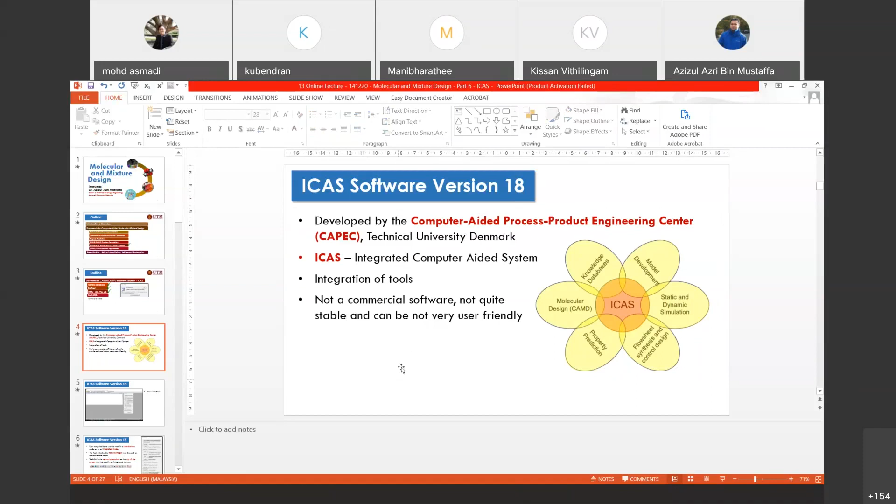So basically, when you open ICAS, I don't think I have to explain to you how to open ICAS. I'm sure all of you know how to open ICAS. Otherwise, let me know in the comment box if you have any chat. So when you click ICAS, then you will see this interface. So this is what we call the main interface, right? So this is the main interface of ICAS.

And then here you will see there's a task manager here.

You can't open the software. Have you opened it before? Mani? Have you tried to open it before? Basically, you can just search for the, yeah. Dr. Azizul, I will help on the chatting.

Okay. All right. So basically, if you have opened it before, then you should be able to open it again lah. It's only that sometimes, like I said before, it may be unstable. It may have problems. Maybe what you can do is try to restart your computer lah. Try to restart it and maybe you will get lucky and it can open. Sometimes that's how I did it lah. Maybe you can try to restart it and hopefully it can open lah.

Okay. It's okay, Mani. Later on, we try to sort it out.

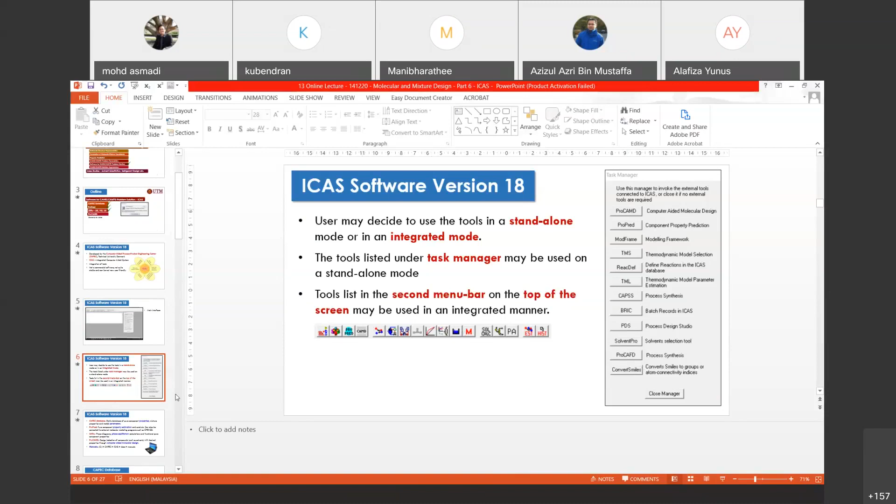Okay, so this is just some description of some of the tools that we will cover today. The first one is the CAPEC database. So now you know the meaning of CAPEC, right? It's the name of the center. The CAPEC database contains a static database of pure component properties, mixture properties and also model parameters. Later I will show you the database. This one is just for introduction.

And then the second tool that we will look at is ProPred. Using ProPred, we can do pure component property estimation and analysis. And then I will also show you the utility tool whereby we can perform phase equilibrium calculations involving VLE, SLE, and LLE. And then, with respect to functional, we can also calculate the functional pure component properties.

And then finally, we will cover ProCAMD, whereby you can do design and selection of components such as solvents with desired properties through computer-aided molecular design. So basically, the steps that we have learned in chapter 4, we will see how we can implement them using software. Because it's quite impossible lah to do design manually. So we need the help of computer tools lah.

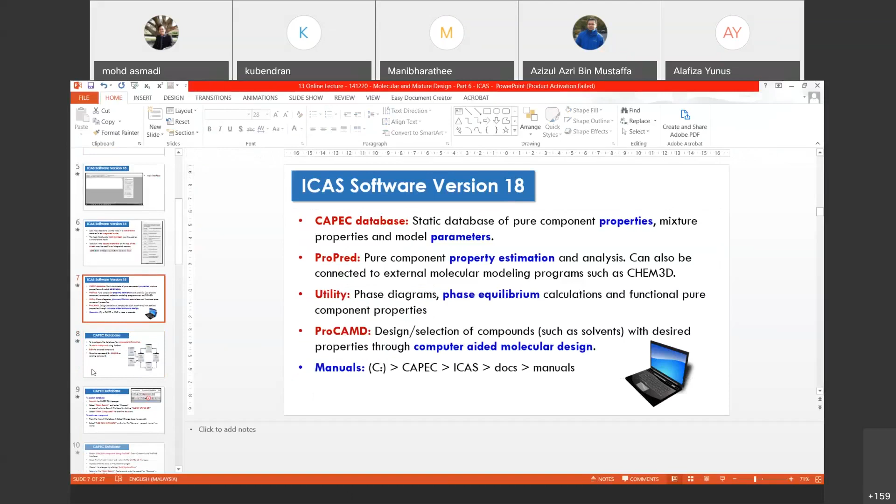And then in terms of the CAPEC database, what can we do with the database? We can investigate the database for compound information. Later on, I will show you how. We can also add a compound using ProPred.

If, let's say, there's a certain compound which we are interested in and it is not in the database, we can add it in the database, for example, using ProPred. And then we can also edit compounds that we have created in the database. Let's say we have obtained new information, maybe new data for that particular compound that we want to add in the database. We can do that. And then we can also create a compound by cloning an existing compound.

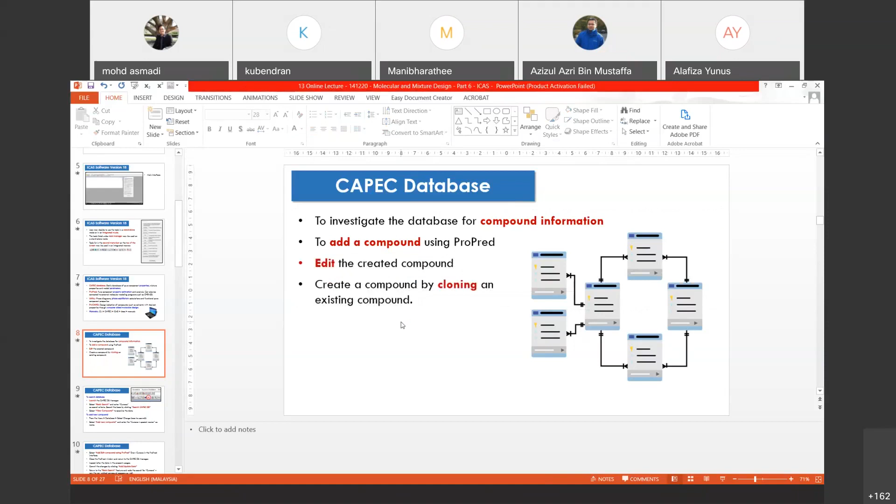Okay. And later on you can read the slide because we already distributed this note, right? So maybe later on you can just read the notes and see how you can do all this. Today I think I will only discuss how to search the info and how to read the data that we have. In terms of adding a new compound and cloning an existing compound, I think you can try to do it on your own later.

Okay, so I think maybe we can go to the database. Basically we just open the ICAS software. Then we will see this interface. Can you see the ICAS main interface now on your screen? Yes. Okay, all right. So basically, in order to launch the database, we click this button, the red M button here. It's called Database Manager.

Okay, so I hope you can do this together with me. Okay, maybe if you have two devices, then it would be better. One with your ICAS, another one with the WebEx.

Okay, so in order to launch it, you just click the button. We click it, then we will see this window. Okay, this is the window. We can maximize it. So basically, I just want to show you how we can look for data of any compound. What we can do is go to the left side of this window and click basic search. Then we will see this view.

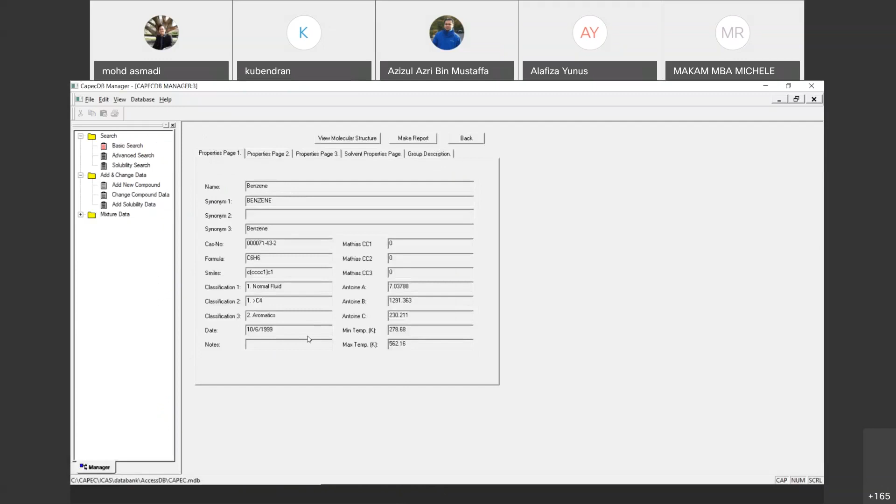So basically for the database, I just want to show you how to search for the compound and how to look at the data for that particular compound. Like I mentioned in the slide, you can also add a new compound here. You can also clone an existing compound, which I will not do because I don't think it's important. But if later on you need to do that, just let me know, or look at the slide or the manual.

So basically, the thing I'm highlighting is that ICAS is not yet that stable and user friendly. You need to adapt to the disadvantages, and hopefully you will be able to get the needed data or compound. Okay, any question on the CAPEC database? Questions in terms of usage, not in terms of cannot open ICAS or cannot find the icon or whatever. Any question? No.

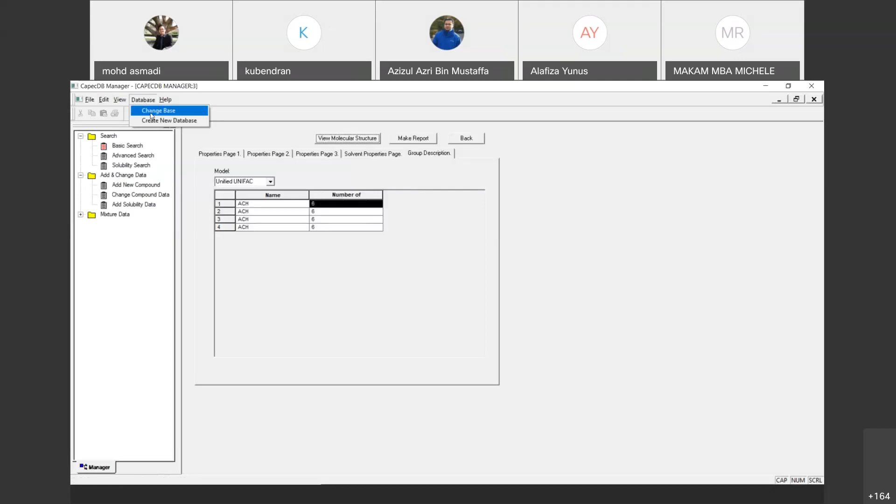It's quite straightforward, right? In terms of database, there are many different databases you can find in this software. If you go to this part, you click this tab, database, and then you can change the database. So there are many available databases in ICAS, and one of them is CAPEC.

How to know this is CAPEC? Just look at the end of the file name. You can see CAPEC.mdb here. So this is the CAPEC database. You can also go to another database, for example, the DIPPR database. Click OK, and you can search for whatever compound you need in the DIPPR database. So there are many different databases available in ICAS.

And how to know which database it is now? You can just refer to this part at the bottom. You can see here DIPPR MDB, so we are in the DIPPR database. Okay, so that is on the database. If there's no question, on to the next tool.

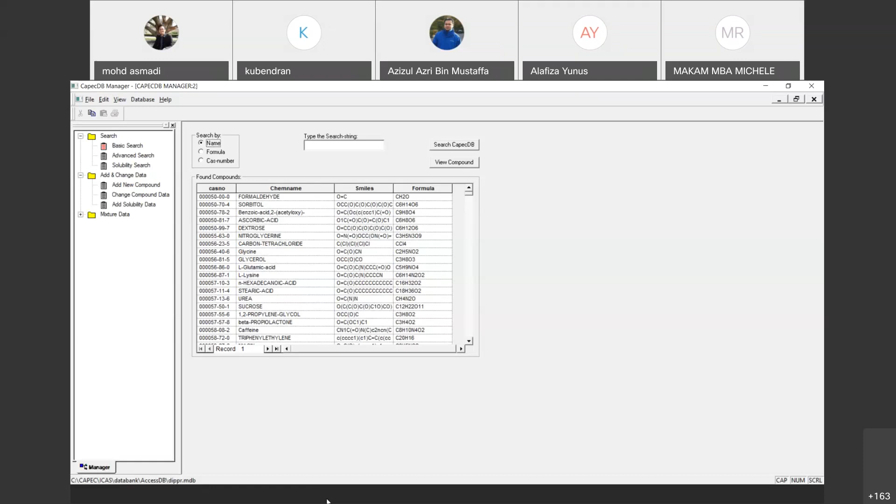So the next tool that I want to discuss with you, or to demo, is the ProPred tool. Dr. Azizul, sorry. Yes. Yep. One question. Yeah.

So which database would you recommend to be used as the default database from so many databases? Okay. So in terms of database, maybe I would suggest either CAPEC or the DIPPR. But it depends, because sometimes certain compounds we don't have in those two databases. So maybe you can try to look for it in other databases. Okay, meaning these two will be the most recommended. So if we can't get what we want, then only we go for other databases, right?

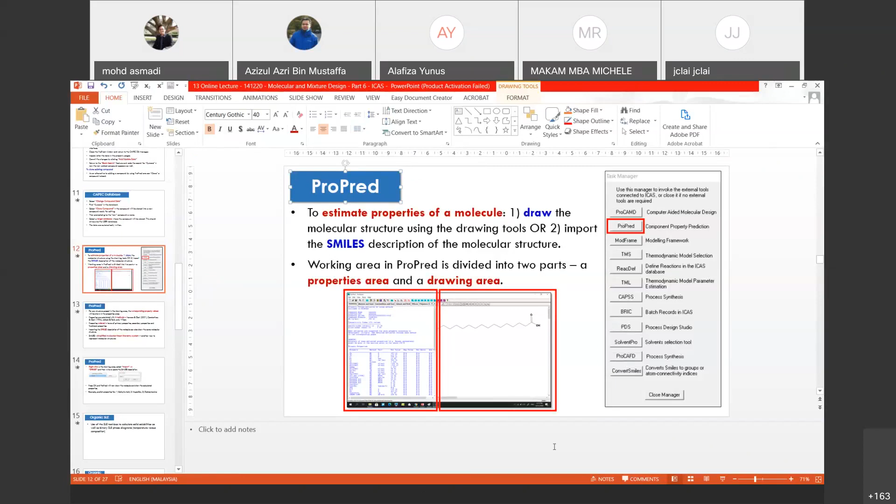Yes. Okay. But the thing with CAPEC and the IPPR database, we cannot edit the database. So if you want to edit a database, then you need to create your own. For example, you can create a new database, and of course it will copy, for example, the CAPEC database, and then you can add whatever other data that you want to add.

Okay, so later on when you look at the manual, you will see that, like for example here, if you need to add a new compound, then you need to change the database to user.mdb. Because you cannot edit CAPEC and the IPPR database, but you can edit the user database.

Okay, right. So moving on to the next tool. The second tool is ProPred. So what is ProPred actually? ProPred is short form for property prediction. So basically, it is a tool that can be used to estimate properties of molecules. In order to do that in ProPred, we can either draw the molecular structure using the drawing tool, or we can import the SMILES description of the molecular structure.

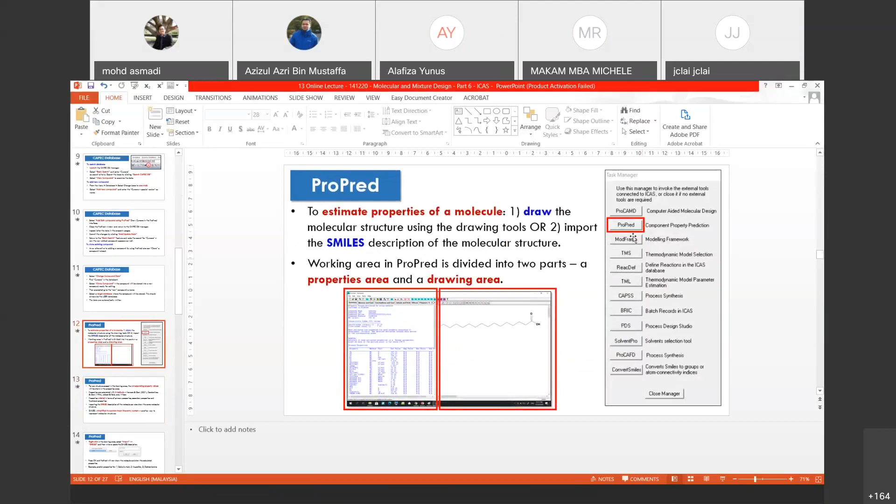There are several ways that you can open it. You can go to the task manager and then click this button, and you can also go to the top part of ICAS and click here, this one, or you can click the toolbox tab and click property prediction. There are three ways how you can do it.

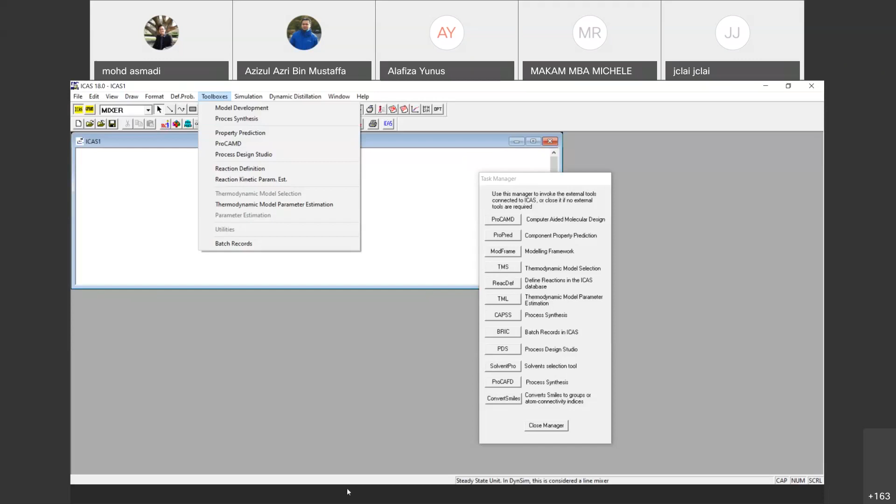But I myself have some problems opening ProPred. I don't know why. Sometimes okay, sometimes having problems. So that's why I already opened it here, so that during the workshop I can already use it. I don't want to close it and reopen because I'm afraid that maybe I will have problems opening it later.

Okay, but actually there are three ways how you can do it. You can click by using the task manager, you can click this button, or you can go to the toolbox tab and then click property prediction. If you click one and there's a problem, you can try the second one. Otherwise, you can try the third one. If something's wrong, then of course you close ICAS and reopen ICAS. If there's still some problem, restart your computer.

Okay, so this is ProPred, right? The left side is the properties area, the properties page, and the right side is the drawing part. All right, so this is the interface for ProPred.

Okay, so for any structure present in the drawing area at the right side, the corresponding property values will be shown in the properties area at the left side. And there are four property models that we have in ProPred, which can be used to predict primary properties. So we have Marrero and Gani, the one that we learned in class. Then we have Constantinou Gani. Basically the difference with Marrero Gani is only that they have only two orders. Marrero Gani has three orders. Then we have Joback and Reid, and the last one is Wilson.

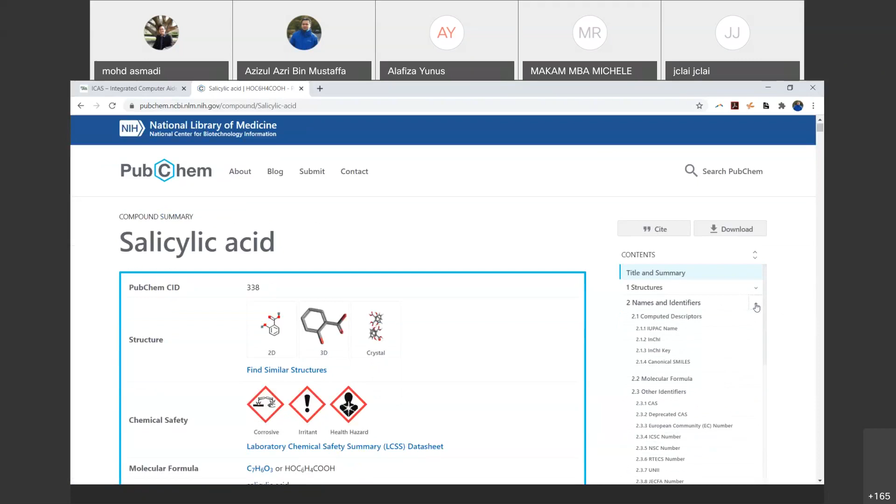Then go to the right part, at the table of contents under names and identifiers. And then we will see at this part canonical SMILES. You can click that one, and then go to the left side. So under canonical SMILES, we can see this coding. These are what we call SMILES. It's like we have eyes and then we have the smile. Just copy this, and then we go to ProPred.

And then I go to the right side of the window and right click. You will see this box. Go to import, and then you go to SMILES. Click SMILES. Then you will see this box. What we need to do here is just paste the SMILES that we have copied from the website. So here it is. We just click OK.

So ProPred will draw the structure for us from the SMILES that we have imported. So we don't have to draw it on our own. But of course, if you do not know the SMILES of a certain compound whose properties we would like to know, then you need to draw it manually, because it's a bit tricky to draw. But you can try later on, if let's say you need to draw.

Okay, so when we import the SMILES, the structure of the molecule is automatically drawn here, and automatically the properties will also be estimated using the four methods that we have in ProPred. So maybe you can click summary for the overall summary. What we can get here is the primary properties. These are the methods highlighted in this table.

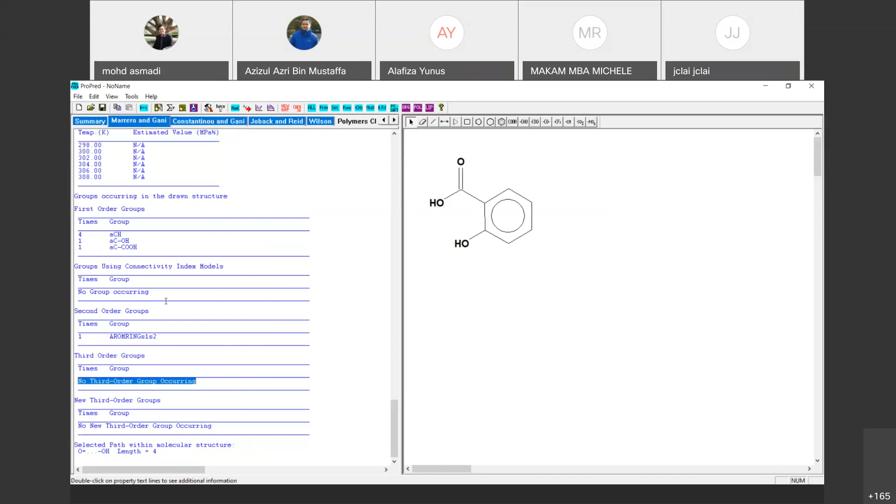Okay. So basically using ProPred, you can also get information in terms of the first, second, and third order groups used in order to predict the compound. And of course, also try the others. We have some other examples, for example, ibuprofen. So you can just go to the internet, write ibuprofen SMILES, and then click this one, PubChem.

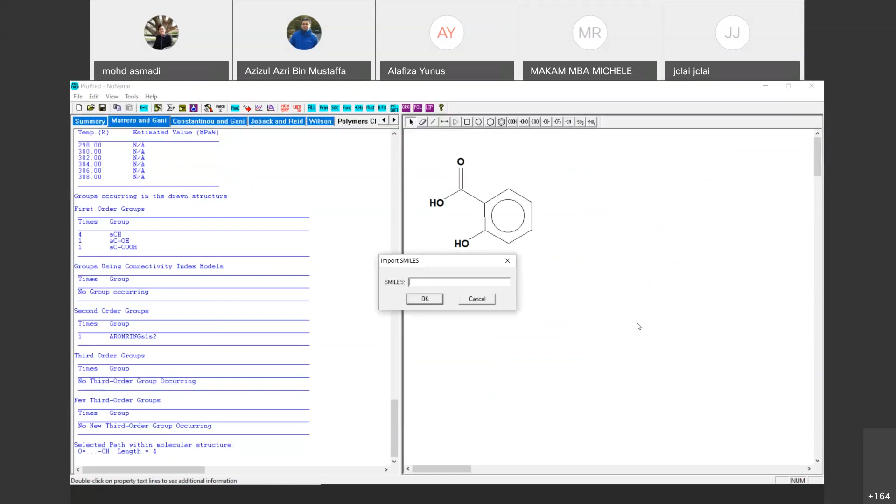Okay, and then name and identifiers, canonical SMILES, and then copy the SMILES here. It's impossible to memorize, right? So we need to copy and paste. Copy, and then here we right click, import, SMILES, paste. Okay, so this is the structure and this is the estimated properties. If we click Marrero-Gani, we can look at the properties.

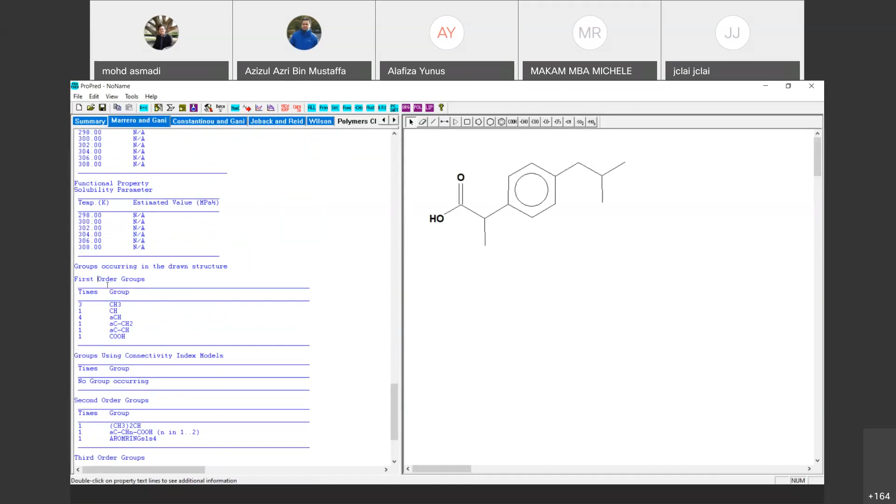Estimated properties here, primary properties, then we have secondary properties here. These are functional properties, but maybe because of a missing parameter or something, they cannot be estimated. And here are the group assignment, group vectors, first order group, second order, and no third order. And of course you can try it for many different compounds. Any question on ProPred? No, doctor. Okay, right.

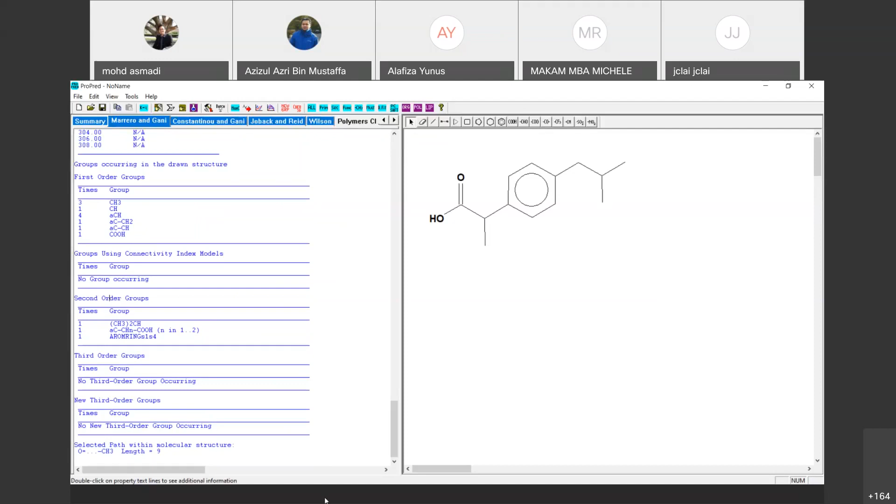So moving on to the next tool. Next I want to show you this SLE, organic SLE. What is SLE? It stands for solid liquid equilibrium. It's important for extraction process, leaching process. So the use of the SLE toolbox is to calculate solid solubilities as well as binary SLE phase diagrams. The details of the steps, you can refer to these slides. But of course, I will show a demo.

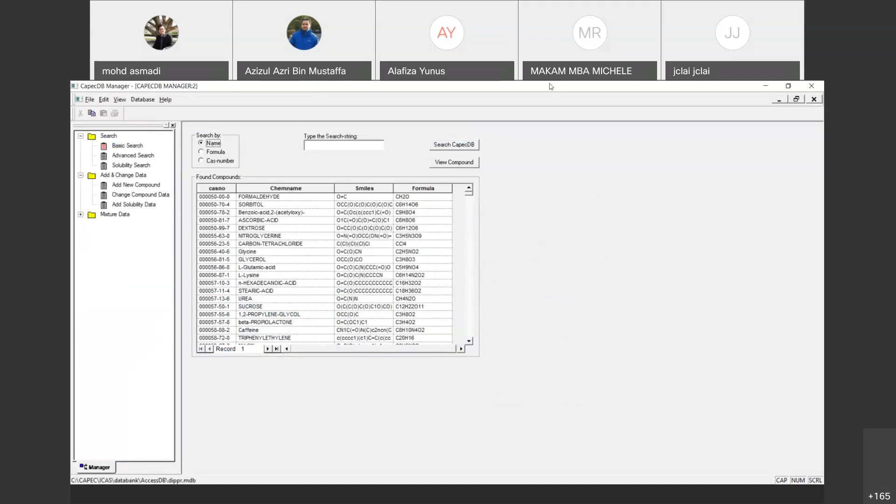So we go to the main interface. This is how to calculate SLE or to generate a solubility curve. First of all, we need to draw a stream. So we click here, this arrow, to draw a stream. Then we need to specify the compounds that we have in this stream, so I just double click on the arrow. Something is running, so I need to maybe delete. Maybe ProPred. Okay.

So when I click the stream, we will see this page. Oh, sorry, but before that, I need to specify the compounds. I need to click this button, specify the components in the system. There are many databases here that we can use. Maybe you can choose the CAPEC database, for example. Let me check the example in the slide. The one used in the slide is benzene and phenol, so I will look for benzene and phenol.

Search here, benzene. Like I've shown before, it's not that straightforward. Need to find it. Cannot find it. Maybe I go deeper. Benzene. Okay, here is benzene. Click benzene and then you click add, at the right side. And then what was the other one? Phenol. Right, we have phenol here. So we add. Then we click OK.

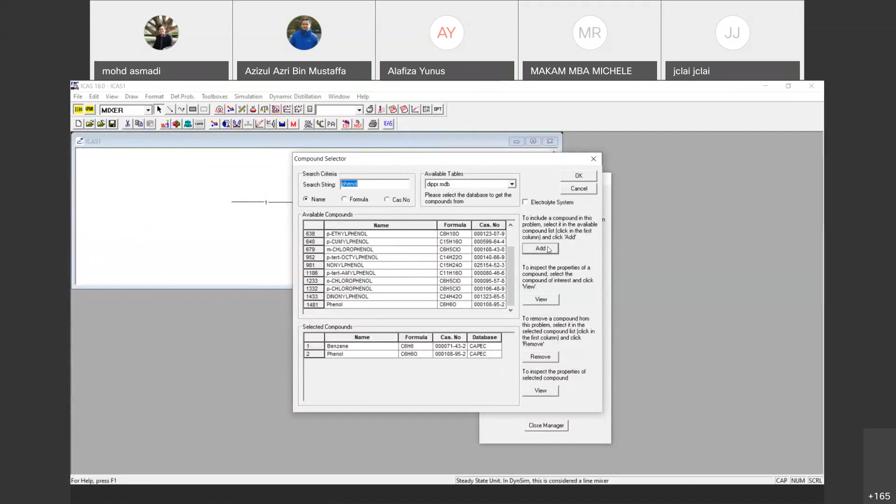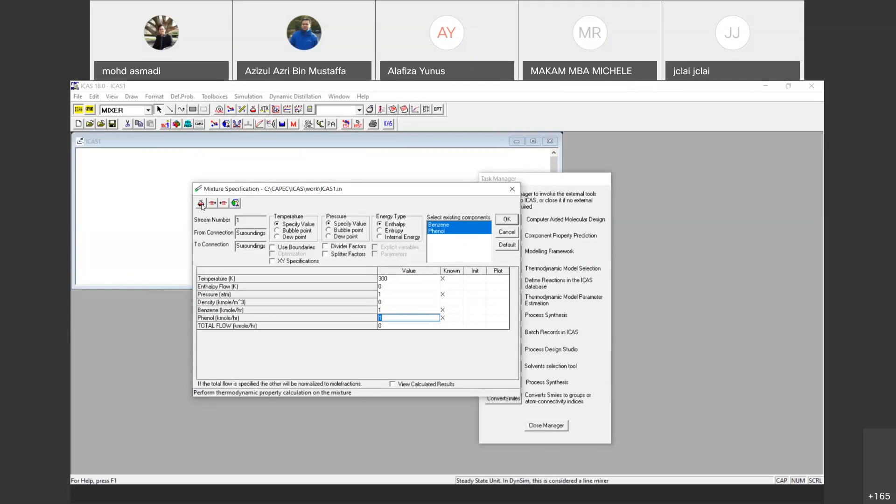Then after that we click the stream. We can already see the components that we selected before. In this example, as an initial value, we can put temperature 300, just an example. Pressure 1 atm, and for the molar flow rate, we just put 1 there. That is just to specify the condition, and then we click this one in order to specify the thermodynamic properties.

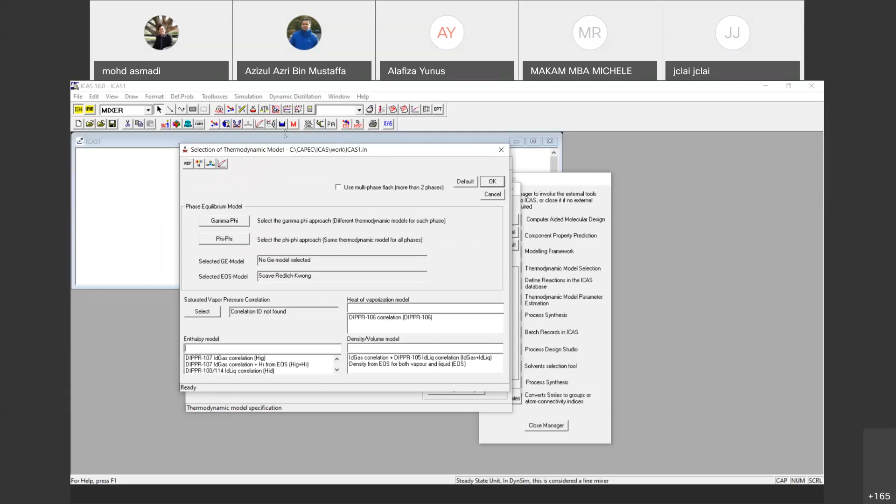We'll see this box, and then we click this one. This is to specify the thermodynamic model. In this way we can perform many different calculations. But before doing that, we need to specify the thermo model first by clicking this portion. This is the thermodynamic model. We can choose gamma-phi here. Then we can select the models for the liquid phase, for the vapor phase, or whatever. So we just specify.

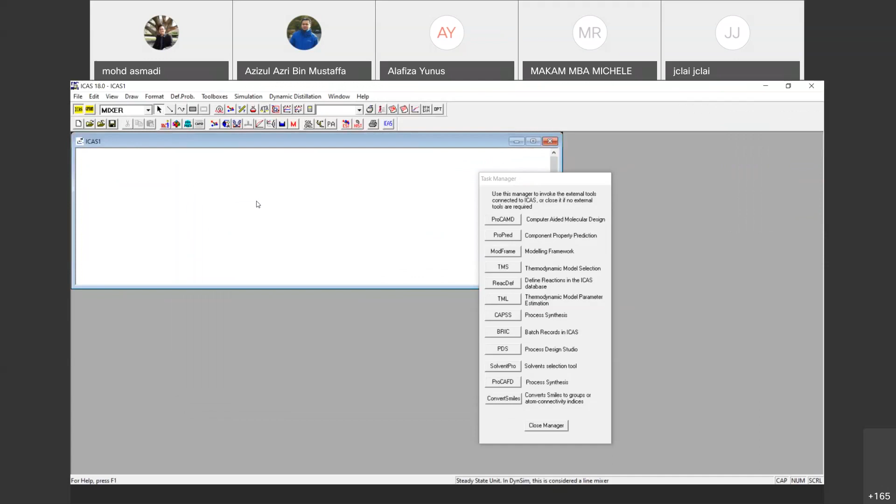Okay, I repeat. It would be helpful if you let me know which part you are not clear on, rather than just say I'm fast or I'm lost, because I can't help you if you say that. I can only repeat.

Doctor, can you please repeat the part where after we add the compounds, what we should do? Okay, do you have the handout with you? The handout. Do you have it with you or not? Because when you refer to the demo, you should refer to your handout. Please refer to your handout.

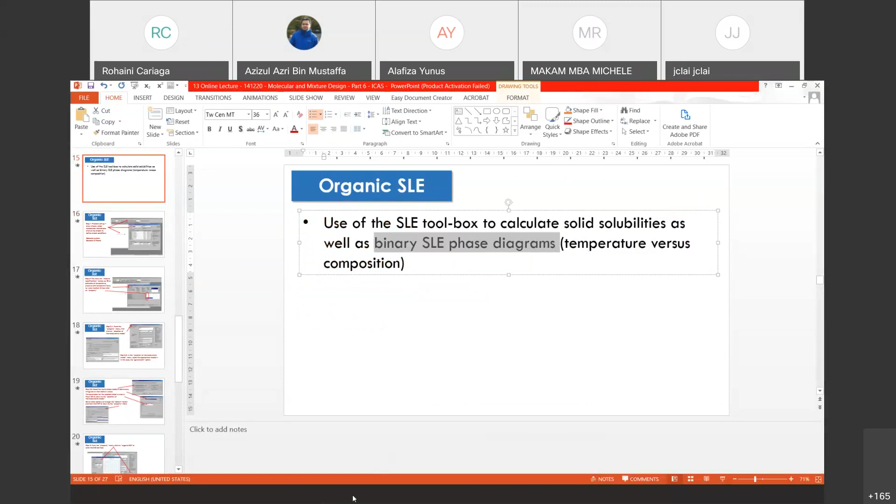Okay, so let me repeat. What do we want to do? We want to perform SLE calculation, whereby we need to calculate the solid solubility as well as the binary SLE phase diagram, which is useful for the leaching process, for example. So we go to ICAS. First of all, what we want to do is draw a stream. Click the stream here and then draw the stream. Got it?

Okay, so now this stream is only a stream. There's no information. So we need to define the problem. We need to specify the problem, by first listing the components involved in the system, right? So in order to fill in information in this stream, we click this button, in order to specify the components. So we click this one, then we will see this box. The title of this box is Compound Selector.

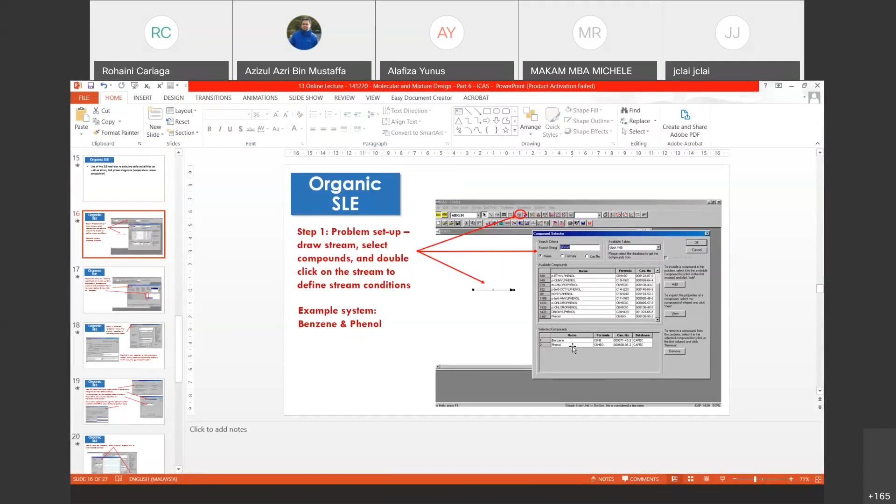Before this, I've shown you some databases that we have, right? So you can see the list of the databases here under available table. There are many databases, but I choose the IPPR. Based on the example that we have in the slide, the system is benzene and phenol. So we just search for it, based on the steps that I've mentioned before.

It's only that for each compound that you have found, you need to click add, the add button at the right side of this window, so that it will add it in this part, which is the selected compounds. So these are the selected compounds, benzene, phenol. Then you click OK. Then in this stream, we already have the components, right? And then we double click the stream in order to further specify the system.

First of all, we specify the temperature, the pressure, and also the molar flow rates. You just put 1 here. Just put 1 ATM, 300. Yeah. Because later on we will generate a T versus X, temperature versus composition diagram, so this temperature is just an initial value. Pressure 1 ATM. So we have specified the initial condition of the stream.

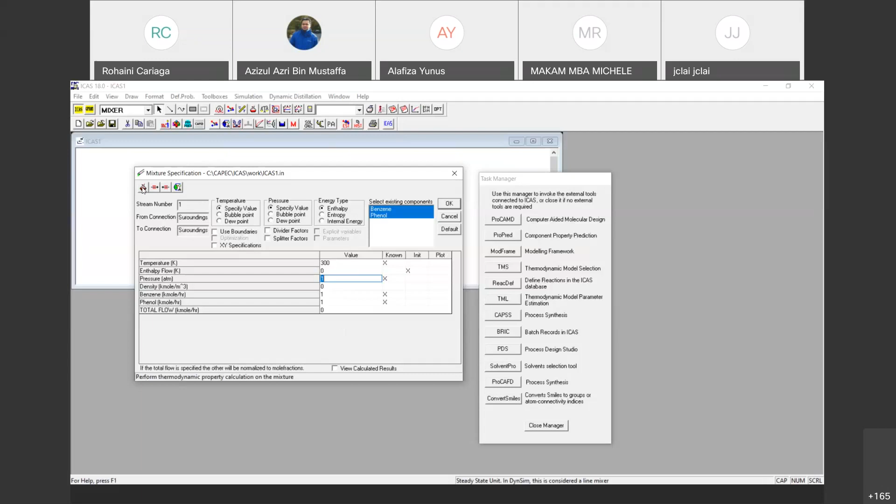Next, we click this icon. This is to perform whatever calculation we want on the system that we have defined. Click this one, then you will see this box. In this box, we can perform many different calculations. But before performing any calculation, I would like to specify the thermodynamic models that are suitable. So in order to do that, I click this button, which is thermodynamic model selection.

Click that one, then you will see another box. This box is where you can select different thermodynamic properties which are available. For this case, under the phase equilibrium model part, I click gamma phi. This one you already learned in thermo, you should know what gamma phi is. Click gamma phi, then we can see that we can select the liquid phase model, the vapor phase model, and the saturated vapor pressure correlation.

But since we want to perform calculation for solid liquid equilibrium, vapor may not be relevant, right? So we just click this one, select the liquid phase model. Currently, the assumption is ideal solution. But here we have benzene and phenol, so maybe it's not suitable to use ideal solution. Then what I do is I change the model. I don't want ideal solution. Maybe I can choose original UNIFAC, VLE, one parameter.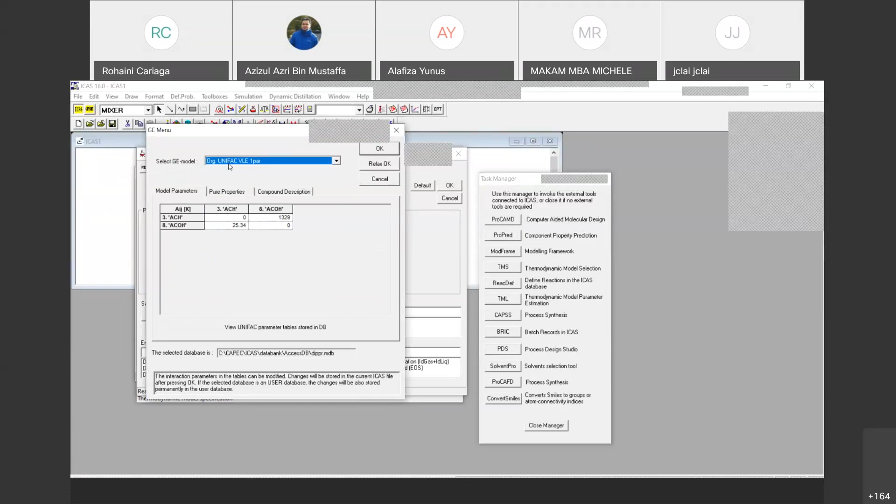For the UNIFAC model, I already discussed it with my section, so maybe they know. UNIFAC is a type of model which is based on group contribution. That's why we can see the parameters with respect to the functional groups. So I choose this model as my liquid phase model. I click OK. You can see here, this one has been selected.

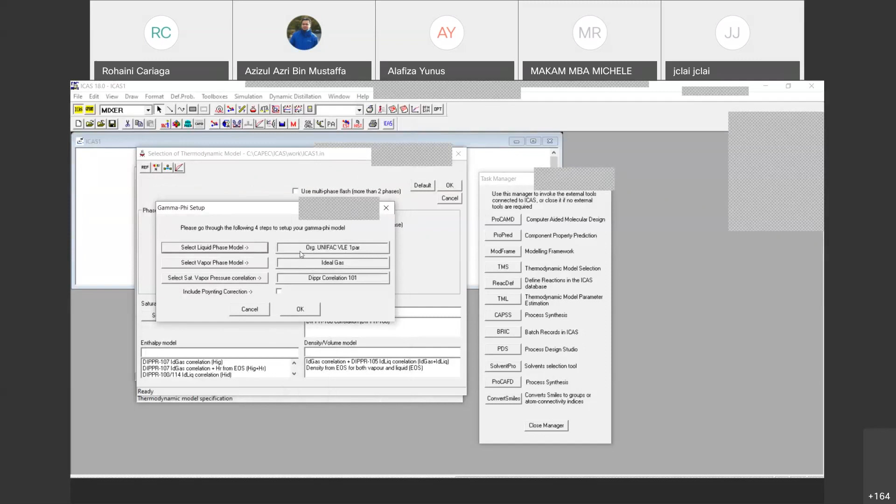Okay, and then I click OK. And then next, what I would do is click this one, default. So basically, for other properties, they will be using the default model. You just click this one. When we click this one, we can see that for the heat of vaporization, it's using this model. For density volume, it's using this model. So those are the default models.

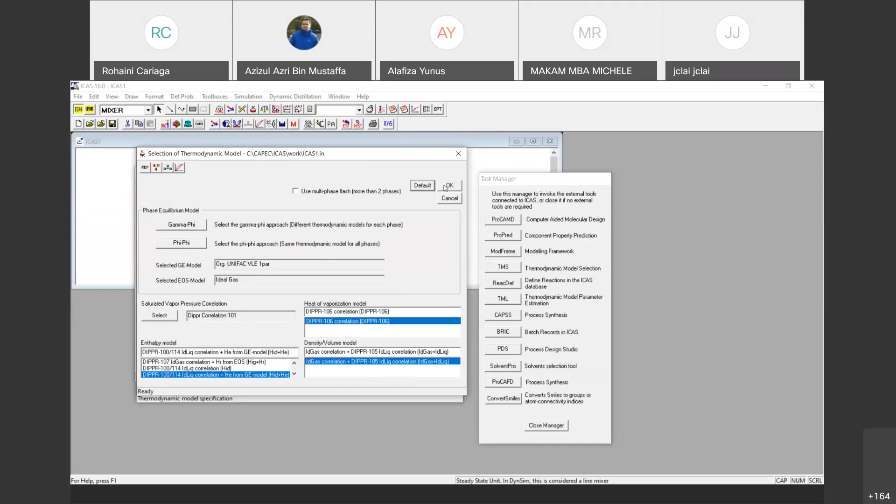And only the GE model, the liquid phase model, is the one which we choose. The other one is default. Okay, after clicking default, then we click OK. After we click OK, the window for the thermo model selection will be closed. So it will bring us back to the box whereby we can perform many different calculations here.

So we want to perform the SLE calculation, so we can click organic SLE here, this button. Of course, there are many properties that we can calculate, right? We would just want to click this one. This is the utility toolbox for SLE. So then we click organic SLE, then we will see this window. Okay, we can see the system and we know the melting points.

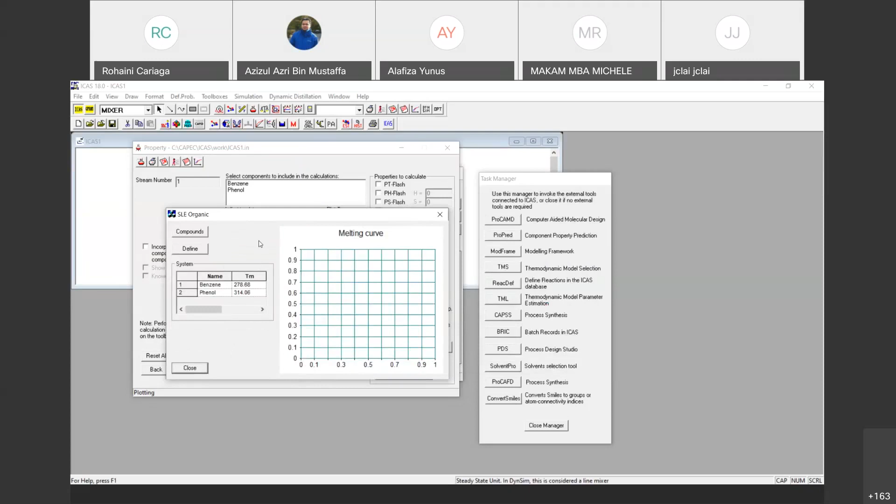Okay, so next what we want to do is generate the SLE curve, the solubility curve. So we click define. There are two ways we can perform the calculation. We can perform the calculation for the entire diagram, so from 0 mole fraction to 1 mole fraction. Or we can also do single point. Maybe we just want to know, at a certain temperature, what's the solubility of the X.

Okay, so here I want to show you how we can generate the entire diagram. So we click entire diagram, and then we click OK. Then here we can specify the increment of the X axis for the points that we want to generate for the whole curve. The lower the increment, of course, the smoother the curve. So we can just stick with the default 0.02, then we click OK.

And then in terms of the mole fraction, this is the range. Do we want to generate the curve from 0 to 1, or from 0 to 0.5, or from 0.5 to 1? We can specify here, but I want to generate for the whole diagram. So the first range I stick with the default 0, and for the end range is 1. So I click OK.

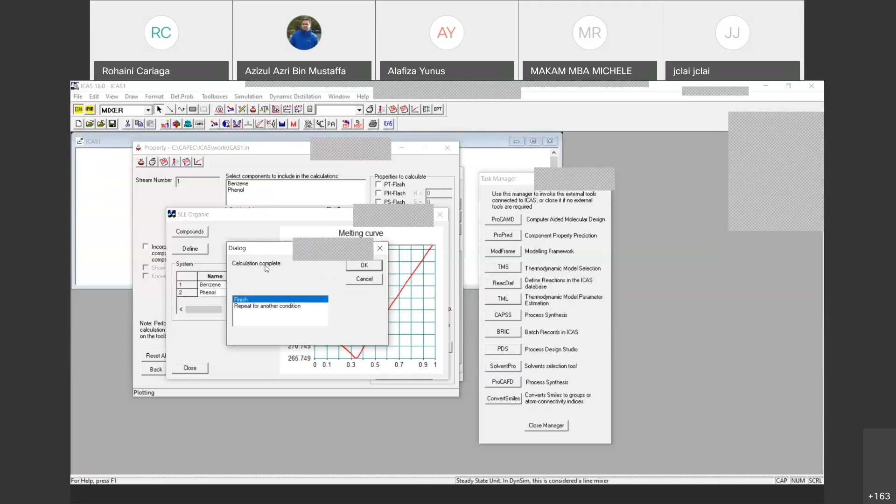So here, calculation complete. So this is the diagram, the SLE curve. And of course we can get information, because this is temperature, this is solubility. So we can know for a certain temperature what is the solubility of the system. So this is the diagram.

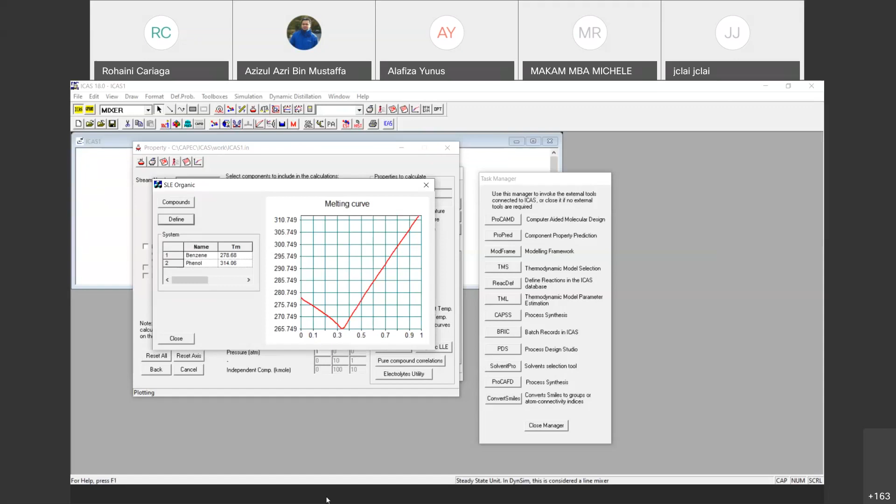In order to get the raw data, if you need to see the details in terms of the values, or maybe you want to do some modification, you can go to this address. Let me show you the path: Drive C, ICAS work. So the output file for SLE is ICAS1 SLE. This one. So you right click this file.

And then open with a Notepad type of app. So Notepad, and then okay. And then you will see these are the data: the temperature, X1, X2. X1 and X2 depend on how you specify the components.

So SLE is important for you to measure the performance when you do a solvent design, for example. You have many different candidate solvents, and you can perform SLE to identify solubility, compare between candidates and select the best one. Okay, so that is on SLE. Any question on SLE?

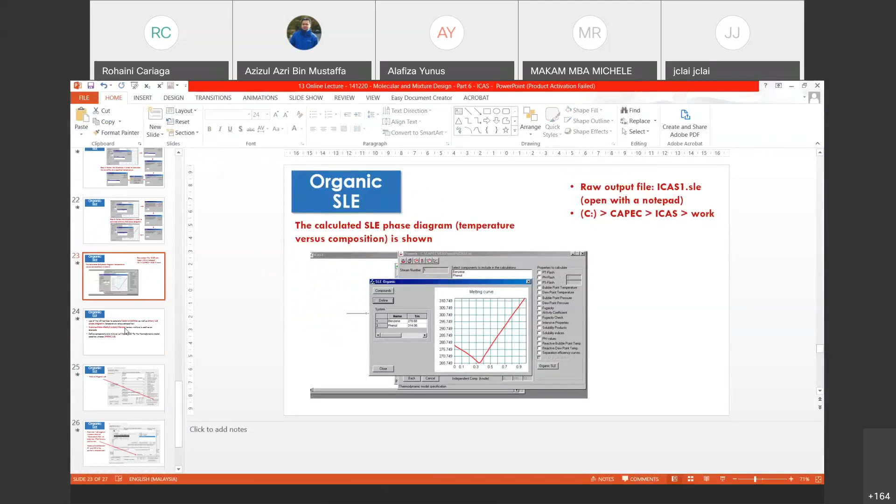No question. Okay, so that is on SLE. Another one is on LLE, but this one you can try to do it on your own. Just follow the steps that I've shared here. Basically, it's more or less the same in terms of specifying components, the thermo model. It's only that for the thermo model, for the liquid phase model, we choose UNIFAC LLE.

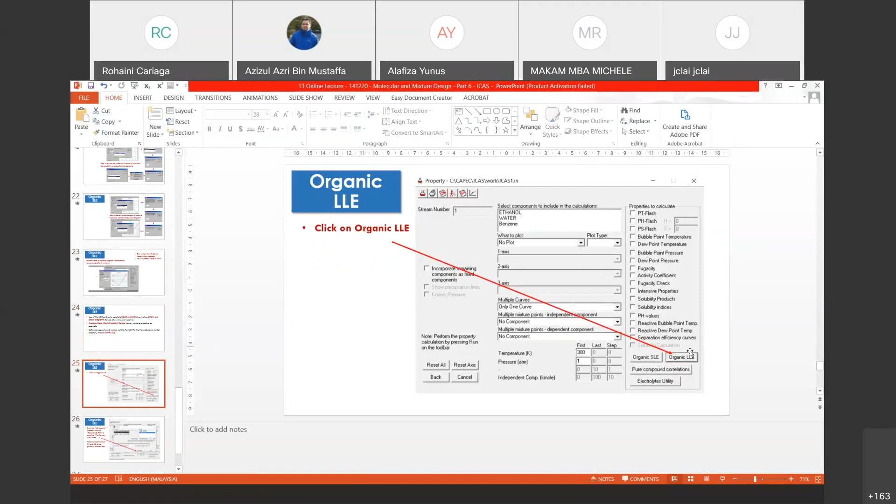This one is specifically for liquid extraction. Okay, and then when you want to perform the calculation, you click organic LLE. And then you will see all these boxes, and when you see this window, you click calculate and plot, and then you click OK. There are several curves that we can draw at different temperatures, so we can specify the temperatures that we are interested in, and then we click OK.

Then at the end, we will get this ternary diagram. Okay, this one you can try to do it on your own. So LLE is also important for, of course, the liquid extraction process, whereby you can identify the best solvent that we can use to extract one compound from another.

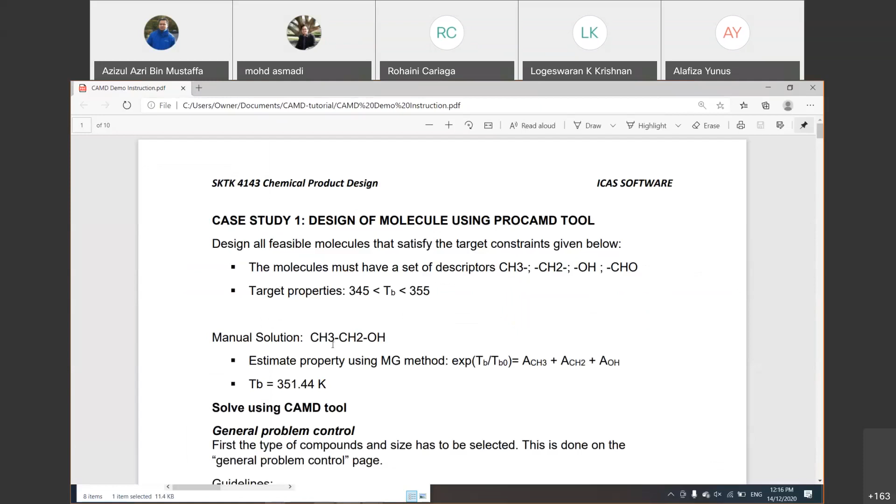All right, so this one is actually under the general problem control. Design an acyclic compound, select alcohol, aldehyde, and then tick generate isomers. So basically you have done that, right? And then under guidelines, you have the second point: the size should be from 2 to 6 groups with maximum 1 functional group. And then select perform database search after generation.

So scroll down to the bottom. Backbone, you don't have to do this one, it's for the polymer. And then if you want to edit groups, you can click edit groups, and then you can add or remove. If you want to define specified compounds, you can do it here, but since this one is the base case, we just leave it there. No need to do it.

And then here, the standard problem control. Normally when you did the manual design, this is the restriction given by Dr. Azizul, how many groups, and here is where you define it. It asks minimum number of groups is 2. The values here are by default, 2, 8, 0, 6, 0, 6 by default. So you need to change them. The first one is the size should be from 2 to 6. The minimum is 2, the maximum number of groups is 6.

So click the down arrow button or up arrow button to increase or decrease. So 2, 6. And then minimum number of functional groups, it doesn't mention a minimum, so leave it as 0. The maximum number of functional groups is mentioned, maximum 1 functional group. So you need to have 1, so reduce to 1.

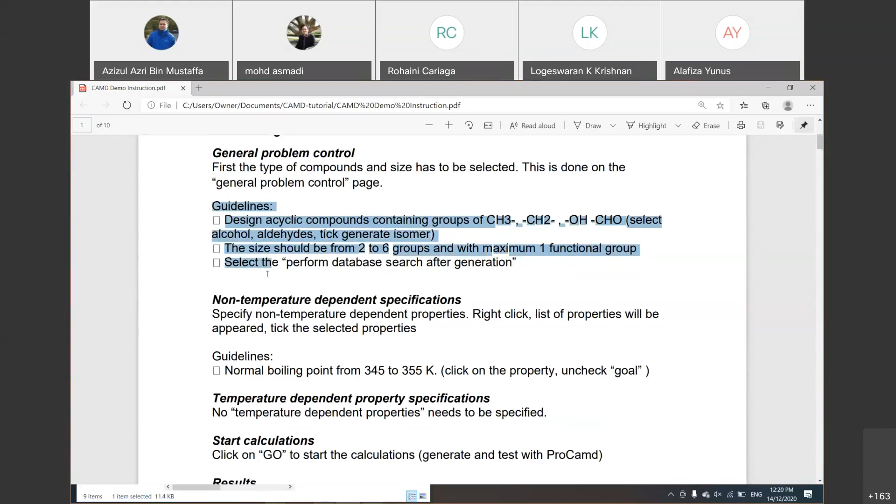All right, done for this one. But you can slowly follow this one. So now we move to the non-temperature dependent specification. You've done this one. Now move to this non-temperature dependent specification. So specify non-temperature dependent properties. Right-click, a list of properties will appear. Tick the selected properties. So now we want to choose the normal boiling point from 345 until 355. So click on the property and then uncheck goal.

Okay, how to do it? Go to the non-temperature dependent properties, put your cursor in this empty space, right click, and then you will see all the non-temperature dependent properties. In our case, we want to have the normal boiling point. Check. Tick the normal boiling point. Again, I repeat, right click, go select the properties that you want to choose. In our case, it's normal boiling point.

All right, so you have the minimum, maximum, goal. Sometimes we want to design in a range, like the normal boiling point in our case. So we need to have minimum and maximum. Sometimes we want to design at an exact value, so we just need goal, which is the exact value. Sometimes we want to have greater than or less than, so either one. What you have to do, you put the cursor on the property, click, and then it will appear min, max, and goal. So you just tick to disable.

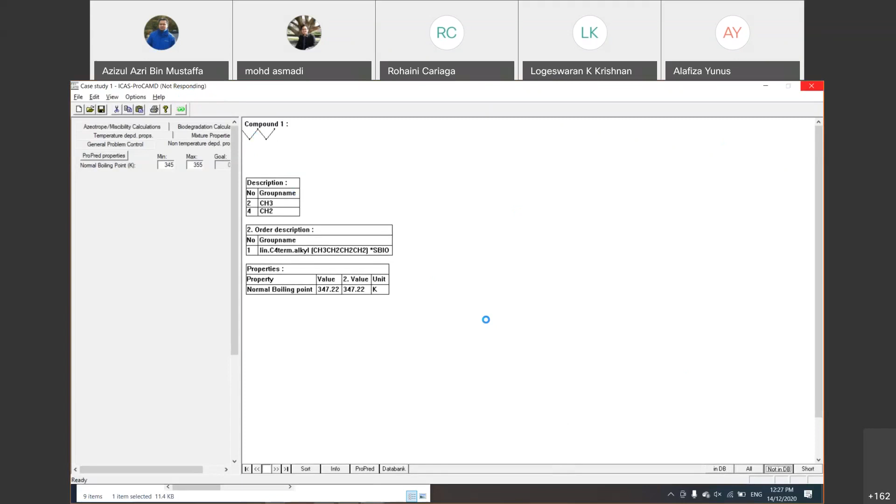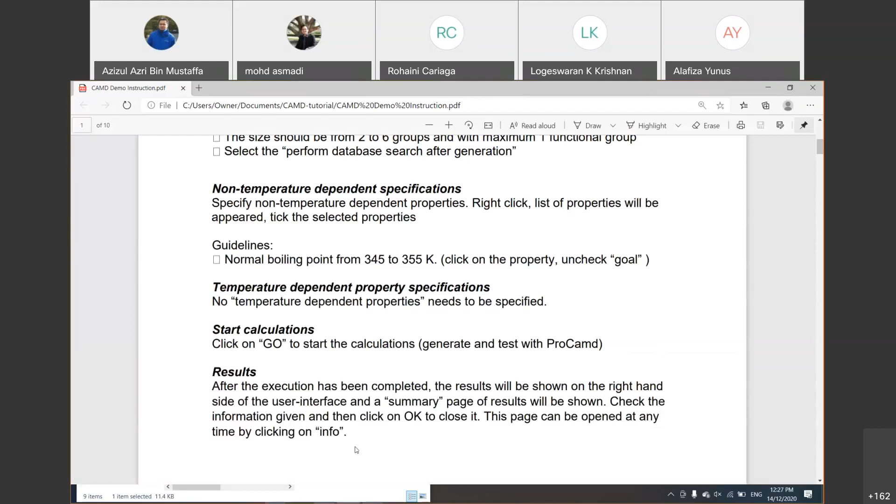All right, this one here shows that sometimes when you design compounds, it's a new compound and there's no data bank entry. So you can click either in data bank or not in data bank. Okay, now my program is not responding. So that's why I said sometimes this happens. If this happens, that means you have to close and then reopen. So that's why saving is really important for you. Because I clicked not in database, but actually there are no compounds not in the database.

So I have opened the case study. This is my case study from before, so I'm back. All right, so you see your compounds here have no name. You don't know what this compound is basically. So what you need to do is go to any compound, click data bank, and here are the following compounds from the data bank that match the first order groups. Sometimes you will see different names appear here because it just compares the first order groups with the database. So this looks like isopropanol.

So you can go to details and then you can see this is the propanol. It has C3H8O. And then you can go to page 2, you can see the properties, and then you can see the group description. So that's why it's mentioned that it matches this group, and that's why it's selected as isopropanol. But sometimes you will see a different molecule. So this one is just to find the name of that particular molecule.

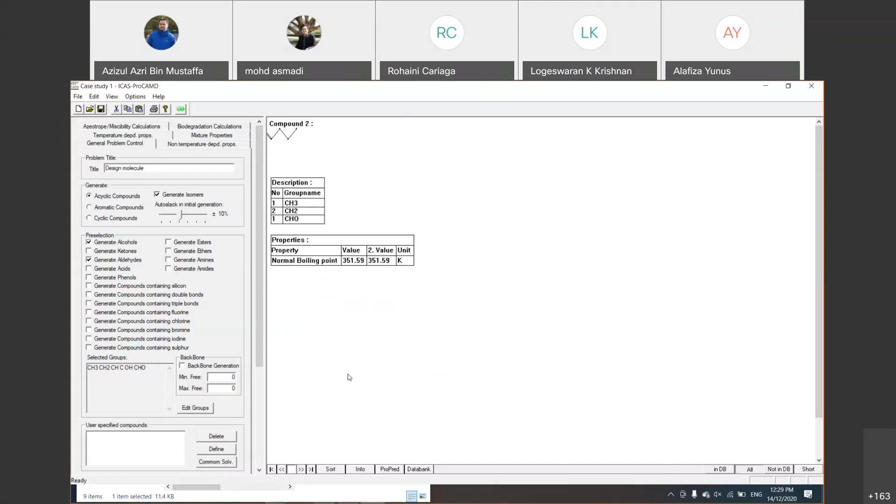Actually, I want to show you that you can also use ProPred. I try to click my ProPred. All right, so that's the problem with my version. Since this morning, I couldn't open the link to ProPred, but maybe when you click ProPred, another screen will appear for ProPred showing the molecules with the properties. That's another way. I'm quite frustrated I couldn't show you ProPred, because there is a function in ProPred I want to highlight. Maybe after this, I will get help from Dr. Asmadi to show you, because I really want to show this function.

All right, so the last thing I need you to do is go to the bottom right hand side, you see short, you click short. Actually, short will give you a summary, a short summary.

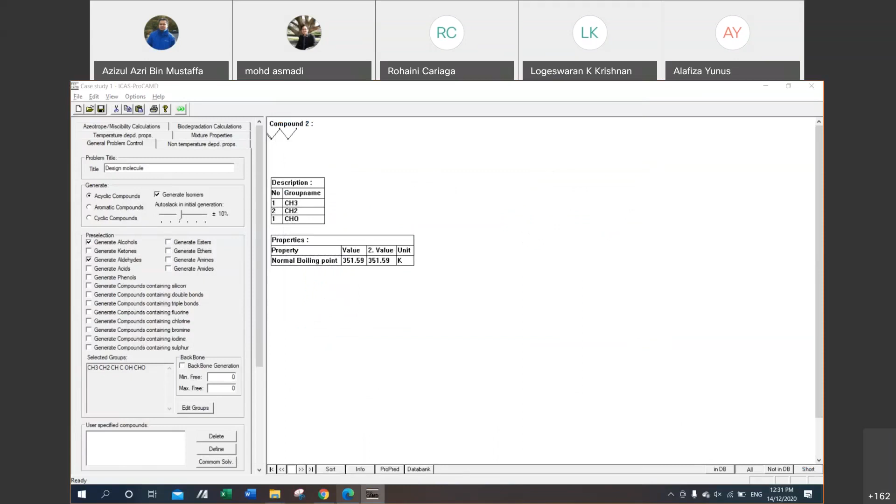So I save in my PC the folder. Case study 1, I just name as case study 1 and then save. So I go to the folder, I open the case study 1. By the way, again, I repeat, you save your file as a text file, and then go to your folder and then open the case study one.

All right. Here is actually a very important summary of results. You can see here is the most important part, the result at the bottom here. If you have many compounds, you can actually copy the SMILES here. So let me just adjust this accordingly. So you can see the normal boiling point, and then these are the groups involved.

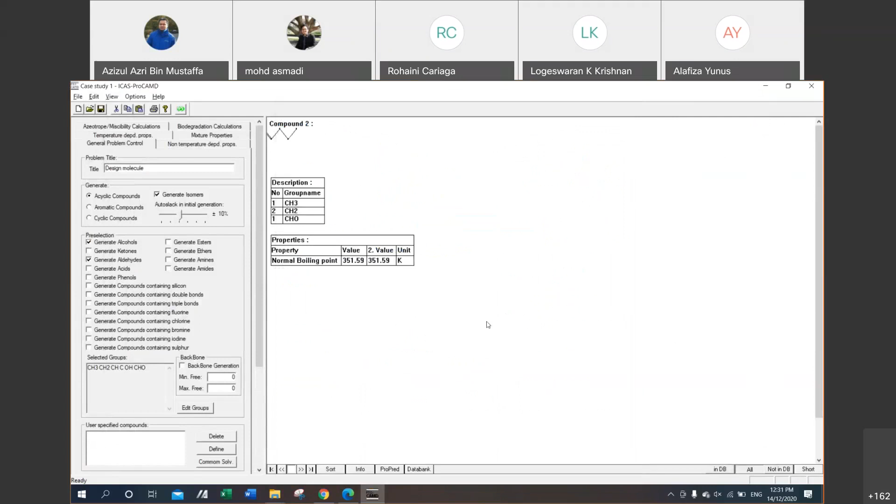All right, so this one is on the second order. This is the view of your results. If you have 100 compounds, it will list all the compounds here. So this will give you the results here. All right, that actually finishes demo one. Any questions before I go to the second one with more properties?

Doctor, from the results we got 3 compounds, right? But one of the compounds doesn't have the functional group. Yes. Let me check back the maximum number. Oh, okay. Because I set it as 0 here. Minimum number of same functional group. Minimum number, 0 here.

Minimum number of functional group, I give as can be 0. That means there is no functional group, also fine. If I set it as 1, then it must have at least 1. I think in the next exercise I set a minimum number. We will see in the next exercise. All right, thank you, doctor. Okay. Any other question? Hopefully we can move faster after this.

So go to case study 2, phenol removal. Since you already know how to do it, you click the new white button on the top left hand side. So click new. So basically a new generate, and then name it phenol removal study, and then do the same thing. So just read the instruction.

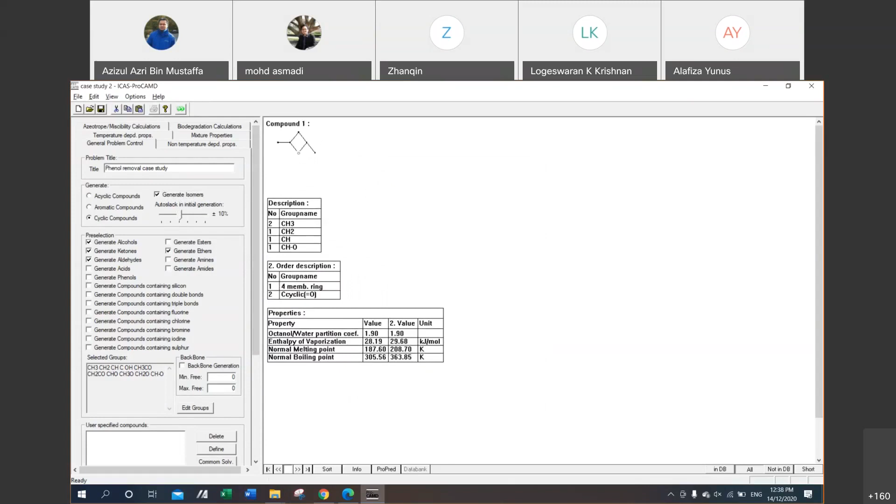And then you will see different compounds. Any question up to here? There's a question here: "Not repeat the same functional groups" means the maximum number of the same functional group is 0. Is it right? Is it in the chat box? Yeah, I have to open the chat box.

"Not repeat the same functional group" means the maximum number of the same functional group. Yes, not repeat the same. Okay, yes, correct. If we put 0, then it will be like the last time: there will be a compound with no functional group at all. Not repeat the same functional group, it will be one. That means it can have one as the maximum number.

Yes, one. This one is one. Only one, because we can have 2 functional groups, but the maximum number of the same functional group is actually 1 because we need to have 1. This one is not 0, it's just 1. Correct. Like this, so 25. So at least 1. Oh yes, correct. For example, OH. So it's only one OH, there's no repeating for OH. Yes, correct. So this one CH2, let's check.

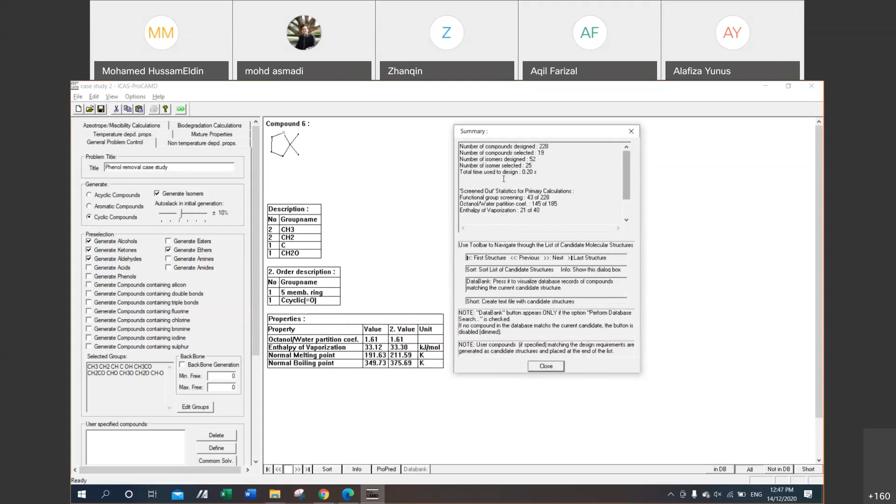Yes, Doctor, I have one question. Yes, Aqil. For the summary, when we click the info for each compound, I got different numbers from you. Is it normal if I got different numbers even though the parameters are the same as yours? Yes. Sometimes I also wonder why you get different ones. It's supposed to generate the same molecules.

But sometimes we encounter that due to some of the functional group screening, and normally when I use the same specification like here, it's supposed to give me the same answer. But no worry, if you generated it according to your specification, just go ahead with that. Okay, thank you, Doctor.

Doctor? Yes. When I click on ProPred to give us the particular name, my computer says unable to load the selected structure at this moment. Maybe that's a problem with ProPred, because ProPred is not able to generate it.

Because on my own computer, I couldn't open ProPred due to a firewall or my virus scanner. It's actually blocked. I cannot open ProPred. Unfortunately, I couldn't show you guys. But you can try again later on. I think I have to restart in order to try ProPred again. All right.

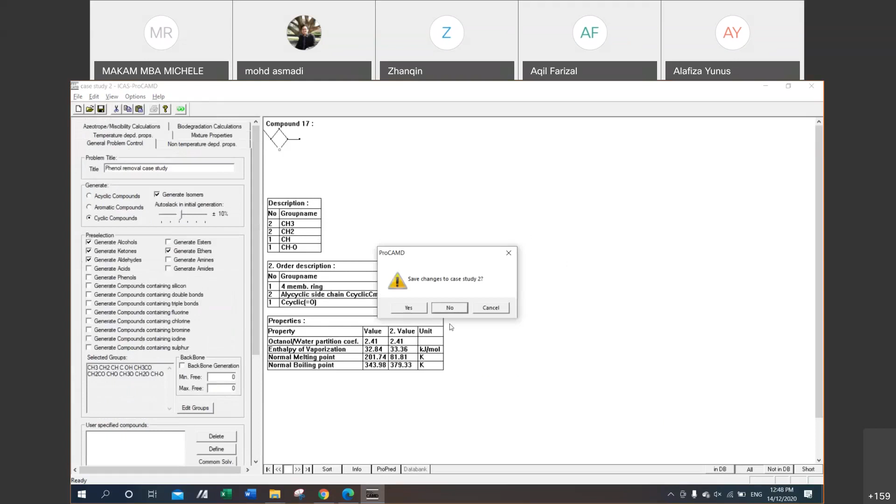Any other questions? Before I move to the last one, this last one is actually very important. All right, I think I have to move. Open the new one. So the last one, the case study. For those who know how to do it, just continue. This case study number 3 I actually got from the ICAS document.

Actually, guys, I want to show you here. Dr. Aziza already mentioned the manual. You can go and check the manual. Case study number 3 I actually got from the ProCAMD manual here. It gives you step by step how to do the specification in the manual.

But other than the ICAS document, you also have examples. You can go to ProPred or ProCAMD and open any of the examples here. There are a few examples here. You can see how they give the specification during design in all these examples.

So this one is actually from the manual. I got this case study 3. It's quite lots of things to do. All right, in the PDF file that I share with you, I give 2 methods. So this one is to design a solvent to separate acetone and chloroform. What type of solvent is suitable to separate acetone and chloroform, because we know that this is actually an azeotrope mixture. We can do this in 2 methods.

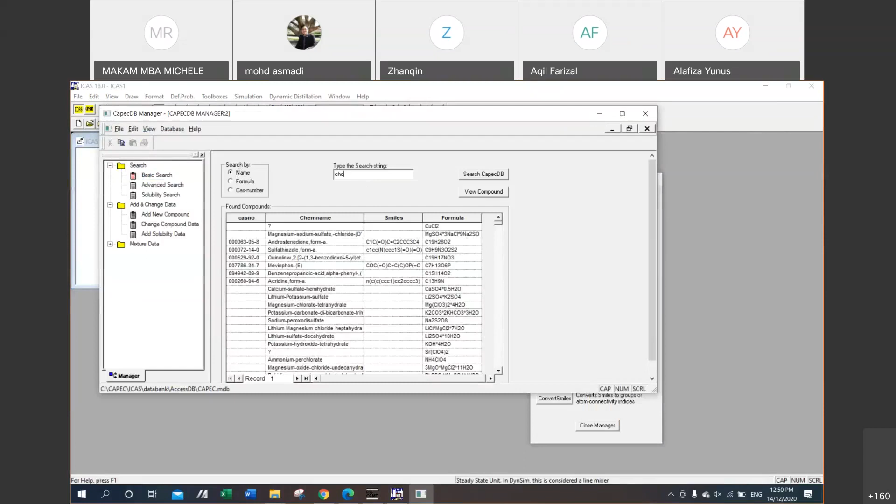The first is using database search. Dr. Azizul already showed you how to do the database search. Let me go to the database basic search using the name. This one I use chloroform. Search CAPEC database. Wrong name. CHLO. So you have this one. You can view the compounds and then just view. You don't have to do anything. This is the view.

Chloroform solvent properties. Under the solvent property page, you can see that chloroform actually forms a soluble mixture with acetone. However, it is miscible with ethanol and ethyl ether. So this is the type of solvent that's suitable, that can be used with chloroform. Acetone is soluble. So this one, basic search.

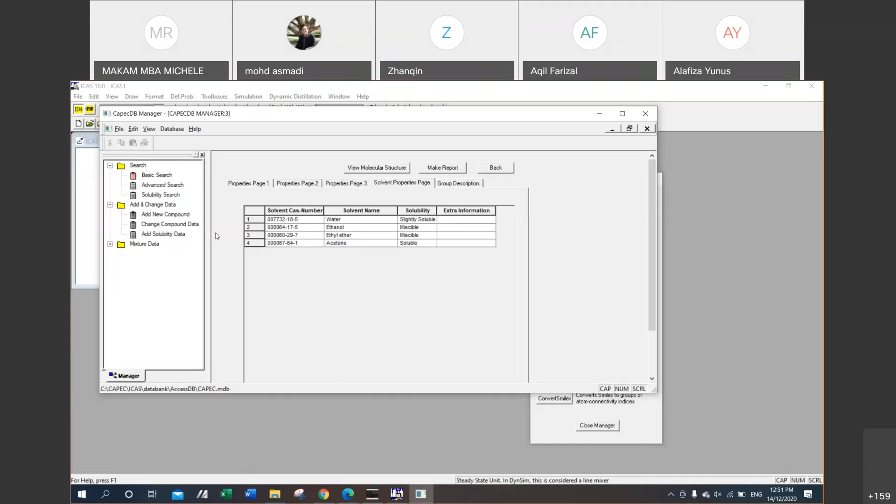And then we can go for the advanced search. You can follow the notes on the advanced search. You can key in property one. Tick property one. And property 2, you have 2 properties. In the PDF, I give you the picture. So select the TB. You can type T and then it appears because it's according to alphabet. This one you type S and then you will get the sol. If you scroll down, it's quite far. It's quite many properties. So you need to just type T and S.

So property value 1, the value is 334 and you should tick greater than. And for property number 2, SolPar, you can click in between. So the property values are 17 and 21. So you can search and then you can see all the feasible solvents that can be used for that particular property. So these are all the potential solvents. So that's actually how you can search for the solvent properties.

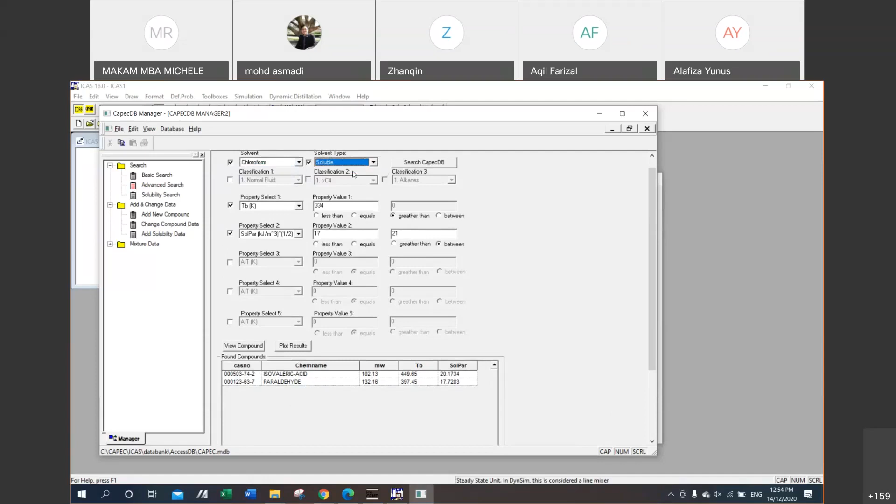Okay, this is if you want to find a very specific solvent for chloroform that is miscible, you search and then you have the suggested solvents that can be used. If you have different compounds, you can name the compounds here and then select what type of solvent you want, either miscible or soluble. Please go check what is meant by soluble and miscible. I don't have much time to explain the terms. Of course, totally miscible. We are looking for the totally miscible solvent. So these are the suitable candidates.

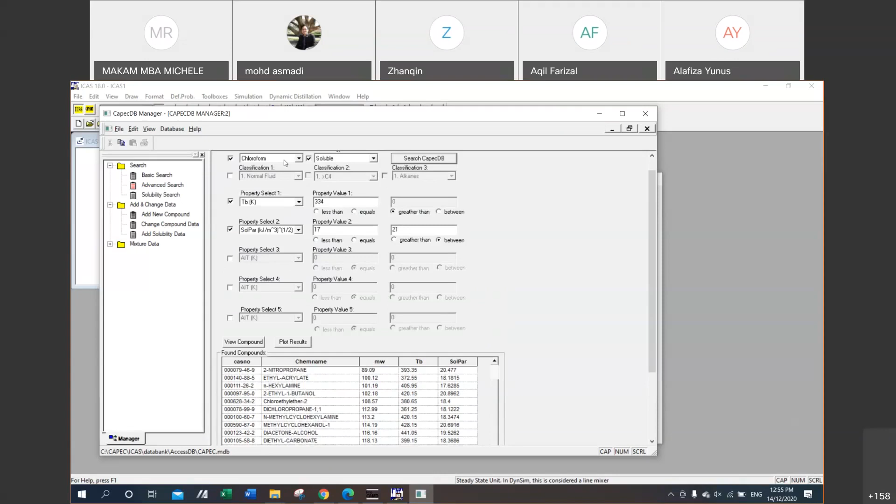So that's one way to check the solvent that can be used, for example, to dissolve chloroform. But I want to go on the CAMD actually. This one you can refer back to your handout. So now I want to go on ProCAMD. This is actually quite many things to do. So the first one, name your problem.

Study 3. All right, see the guidelines: design an acyclic compound, generate isomers that have groups with C, hydrogen and oxygen. Select all. So alcohol has oxygen, ketone, aldehyde, acid, phenol. These are the compounds that have O. And the size should be from 4 to 8 groups, with maximum 1 functional group. Minimum number 0, maximum number 1. Okay, see here the specification. Save. Okay, study 3.

Those who are fast on this computer can go very quick because we don't have much time. Molecular weight, normal boiling point, tick on the goal. This one is 70 up to 120, 340 and 420. This one okay. All right, pay attention to this one, mixture property. Tick mixture property.

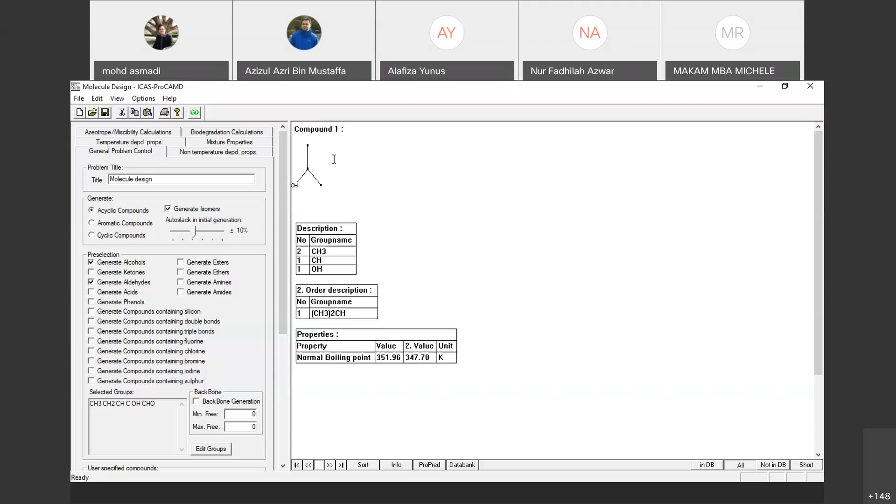I cannot open ProPred, I don't know. The firewall is actually suppressing ProPred. Other tools I can open. How about this one? Can you see? No, I cannot see. Okay, Dr. Asmadi, this one.

Dr. Asmadi, can you click on the hand next to the search database? Yes. Search database. Basically, you can see there is a name. Previously, there was no name. So when you click search database, it will appear, and then for properties they will give you more values in terms of experimental values. So that's the application of this. Normally it's just no name, you have to double check. That's what I want to highlight on this one.